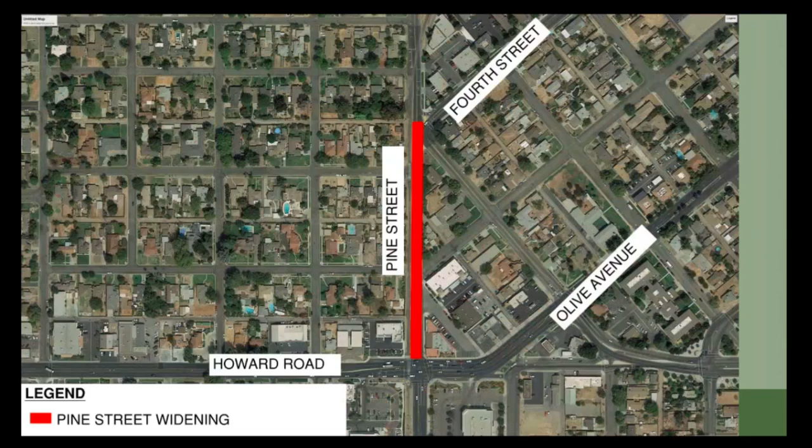So in the future, if someone bought property and they wanted to develop north of Almond, then they would be responsible for that portion. Or if somebody else built it, they would just pay us back if we were to put in that street, correct?

It depends upon how we fund it. We can go ahead and make a request for reimbursement of those improvements. That hasn't traditionally been done when we build roads, but then neither do we typically build roads where development's going to occur on it. One prime example is the roadway infrastructure out by the airport.

There's grant funding used to pay for that, and we have not requested reimbursements because there's grant funding. There are many models, and we can explore whatever you might want to look at. We can, of course, enter into reimbursement agreements where we indicate that they need to reimburse the city for their costs.

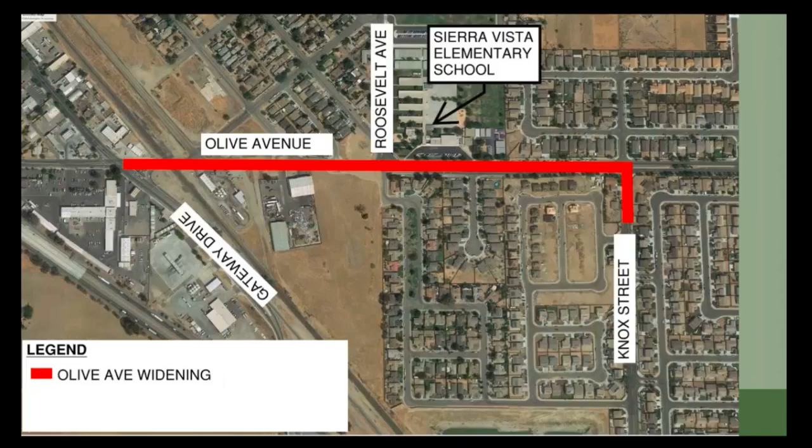Okay, so what I'm going to go back to... It's cold in here, I feel it in my fingers. You said it's cold? Let's take out my sweater. He says it's cold, turn the air conditioning down. We need to put 200 people in here. It's cold like last night, and then it'll warm up real quick. Somebody better speak, huh, you're cold. I am too, I was going to leave. It's too cold up in here. I got my jacket, okay. Somebody give him a shawl. You're a woman, want to borrow my jacket? Give him a sweater. I'll just turn the air conditioning down. Big boy, wrap you up. I can't think when I'm cold.

Going back to this list of projects, right now the CIP generally assumes Olive Avenue, Lake, Pine, and Almond. If I were to make a recommendation to council, I would suggest that the intersection of Pine and Howard move forward of Lake Street, and then we study Almond Avenue to understand further. I would agree. Good.

Councilman: Garcia, could you go back to the graph of Almond? Sure, so do they have any plans of where the access point to the subdivision would be? Let's see, right about that point they have an access, if you can see my cursor, and then there's one right about there. If that becomes a problem, I foresee the potential for medians going in on Stadium at some point in time, and possibly part of the study.

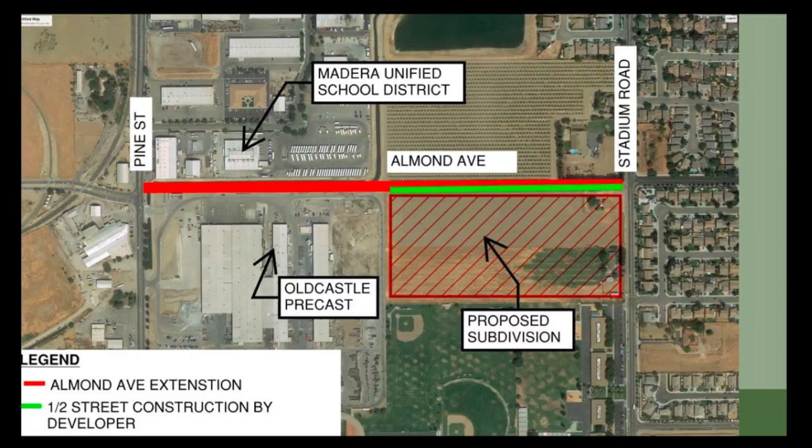To do anything else, you run out of room. To get two lanes in each direction, you run out of room for bikes. To get a left turn lane in there, you start to run out of room for two lanes each direction without starting to squeeze lanes. Squeezing lanes sometimes has a benefit, but squeezing lanes is more about reducing speed, which I'm not necessarily aware of speeding issues out there. So that would basically be where it would go, to put the road on a diet. That's, believe it or not, a technical term for traffic engineers.

You thought I was making that up? I was not. I agree with Cece. We used to take our kids to Alpha, and we also used to take them down to South Campus, and I remember it's crazy.

I'm just trying to figure out in my mind what the possibilities are to limit on Stadium Road, because as soon as you start getting the traffic and then try to have somebody cross over to the other side, to the west side, one of the ways to do that is to take away flexibility. Flexibility tends to lead to congestion and slowdowns.

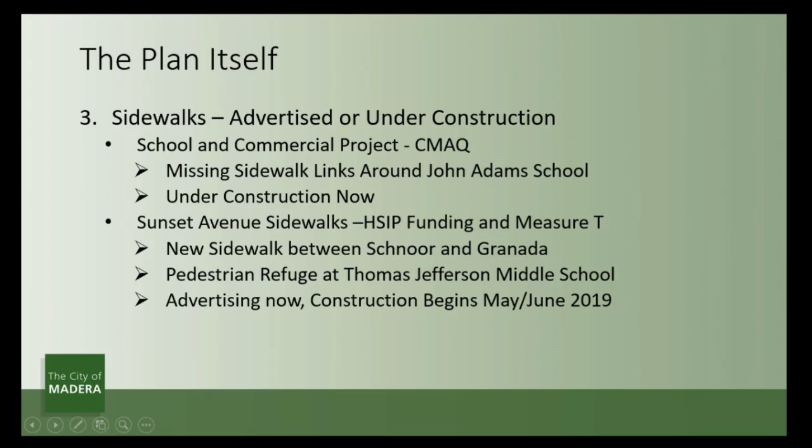This area here, under construction, or will be soon. This is the area where I indicated that there was missing pieces, and that missing piece was a problem for us a few years back when CVS was under construction. We actually had one person in a wheelchair that had to shift from one side of the street to the other, and they didn't have a place to go. We remembered that, and we're fixing that.

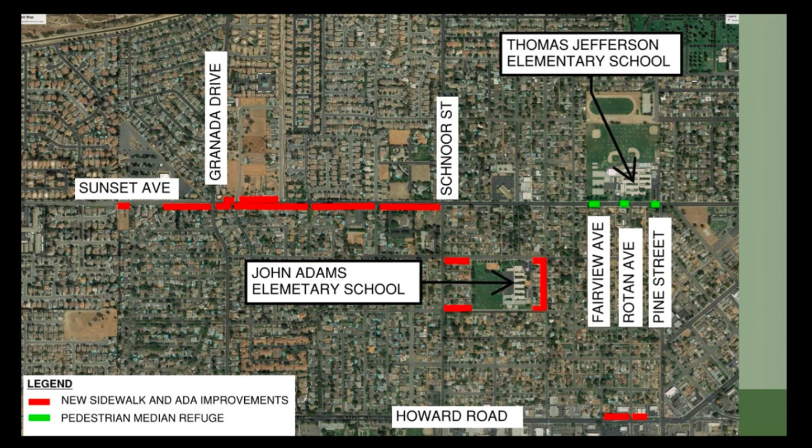Upcoming, Washington School sidewalks, we see that coming summer 2019. I mentioned that the last thing on that was right of way. If the AHSC grant is successful, additional improvements will be dropping in around that school, including pedestrian flashers, enhanced crosswalks, and a couple other things.

Fresno River Trail, the UPR undercrossing, this has been in the works for 10 years plus. We think we are finally there. It's been a long haul trying to get on the same page with the Union Pacific Railroad, but we think we're there, and you see that in the CIP going to advertising spring.

Gateway Central 3rd, additional sidewalks using CMAQ and LTF. We look to advertise that summer of 2019. That's subject to release of CMAQ funds, and there's not a guarantee that we'll have that released this year with regard to funding. Now, those projects dropping down on the street are shown here. The green is the undercrossing, and the red are sidewalks dropping in place.

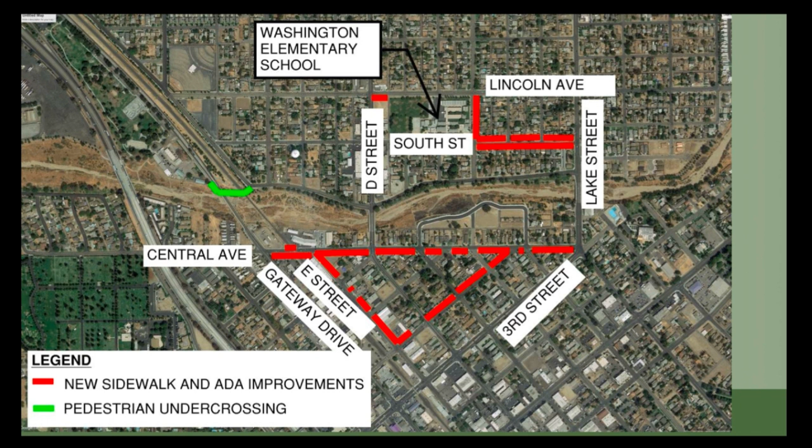They'd be coming in at least a year later, but there are time restrictions on the AHSC funds. So those will be, given there's 5 miles of sidewalks, those may very well be going out to consultants. Now, one of the things you'll see about sidewalks is we do a lot of those in-house because it's quite frankly more cost effective than hiring a consultant. When you get into more complex projects, consultants make sense.

Mayor Pro Tem Montes: I just have a question. On 145, do we stay away from that as far as maintaining the roads, doing anything, and the sidewalks as well? On 145, so it would be Madera Avenue? At the moment, yes. There's been on and off debates about who's responsible for some of those. So everybody's saying, no, you're responsible? I think we got them to believe that they're responsible. Okay.

Preliminary award, CDBG. We have 2 on CDBG right now, the missing links around James Madison and MLK. That would be coming in summer 2020 if awarded, and set as a priority over other projects. So I just want to be clear about that because we can move anything forward, we can make anything a priority, but something usually moves into the background as a result.

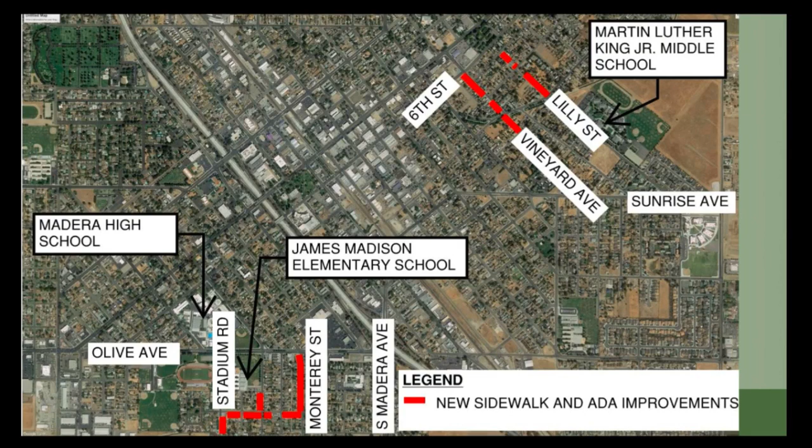There were sidewalks on the last list for the CDBG coming forward, potentially.

AHSC, the Affordable Housing and Sustainable Communities grant, that's for the low-income housing and veterans housing at 5th and C. If successful, that will not only provide the city with those structures and an improvement to downtown, but it will also result in as much as 5 miles of sidewalks and 3 miles of bike lanes. If awarded, which I believe we'll know in June, they have very specific delivery dates, and it's a fast pace. I believe it's summer 2020 for delivery, but we have to go through environmental review, and I think we avoided any right-of-way issues with regard to it. That is the AHSC grant sidewalks.

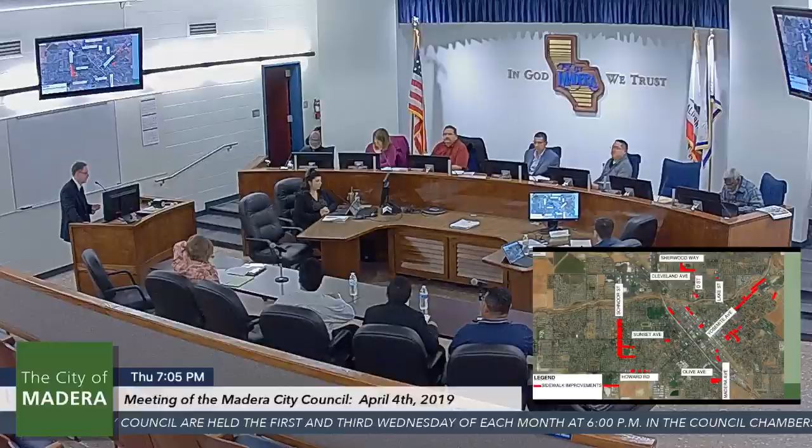Sidewalk repairs. I thought I'd throw this in because we're talking about this a little bit more these days. We don't have any projects proposed, and that's per past practice. Our current policy is that repair responsibility rests with the property owners. We do provide some assistance through the 50/50 program, which, when a property owner considers it, doesn't necessarily work out to being much assistance, because as soon as the city puts money in the game, prevailing wage requirements also come into play, as well as insurance requirements and everything else. We're kind of stuck on many of those things.

Now, can the city do more? It's kind of a cost versus liability situation. Can we get past it? What we know is if we start throwing money at repairs, we may create an expectation on the part of the community that the city takes care of the repairs. I suspect, I'd more than suspect, I know there's more repairs out there than the city can afford in a reasonable time frame. So if we start there, we'll find ourselves picking and choosing where we repair and why this person doesn't get it now or in the near future. And if they don't get it now or in the near future, what becomes of that spot? The city's now on notice, and the liability starts to hang in the air.

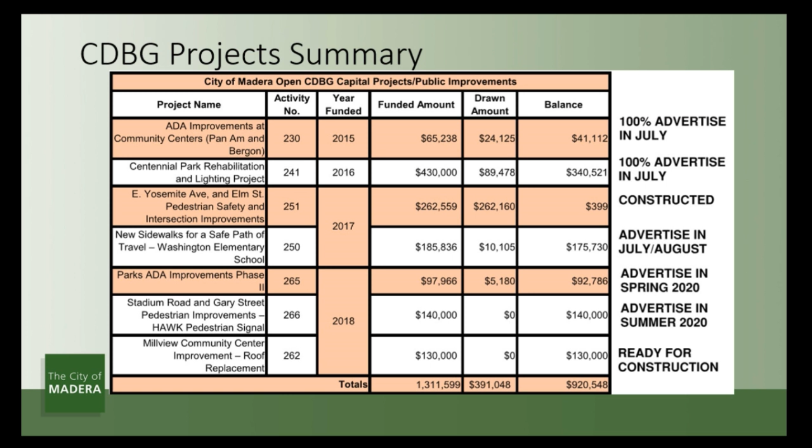That can be a selection process—council can tell us how you'd like to go ahead and do that. We generally foresee that going back to the committee, right? That's one potential way.

So that's the first two projects. Yosemite and Elm is constructed and functional. New sidewalks for safe path of travel at Washington—you saw that's for July, August. I'm not sure if there are typos here, but it's supposed to go this summer.

Parks and ADA improvements, including City Hall and a number of other things—that would be advertising in spring 2020.

Stadium Road and Gary Street pedestrian crossing—the HAWK. Have I shown you the picture of the HAWK yet? I don't think I have. I know you're all excited about it. It overhangs the street like that. I'm just going to move ahead—there's a hawk.

What it does is when you push a button, it goes from yellow to all red, functioning generally like a traffic signal. You get better compliance with this than pretty much anything else. Arizona seems to be installing these everywhere—my first encounter was in Sacramento. I thought it was a good device, researched it, and this will be our first opportunity to see how it works. Ultimately, the best way to protect pedestrians is to stop the cars in their tracks.

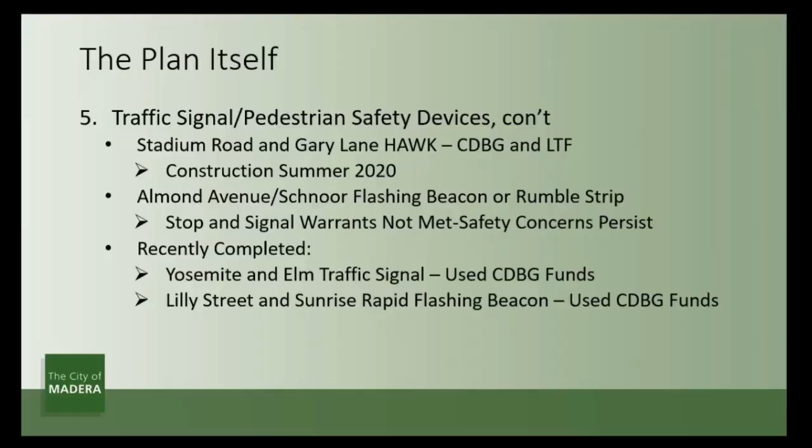Millview Community Center roof—that's okay.

I apologize, this is coming straight from other sources. You just wanted to let me know my graphic was too small. This is going out ready for construction.

Do we still use that center? Yes, absolutely. Isn't that in cooperation with CAPMC as well? I think this is the one where CAPMC threw some additional dollars in—they paid $40,000, if I'm not mistaken, toward completing the whole roof project, so this will be $130,000 going fairly quickly, and we'd have to do it in pieces.

Streetlights—that was discussed last night. We don't have any capital projects planned for that; it's outside the CIP, but ENGIE Services has identified multiple projects as part of the Integrated Energy Assessment Identification of Energy Conservation Measures project. This slide came straight from them, so I wasn't able to improve it much, but those red lines represent proposed streetlights throughout town.

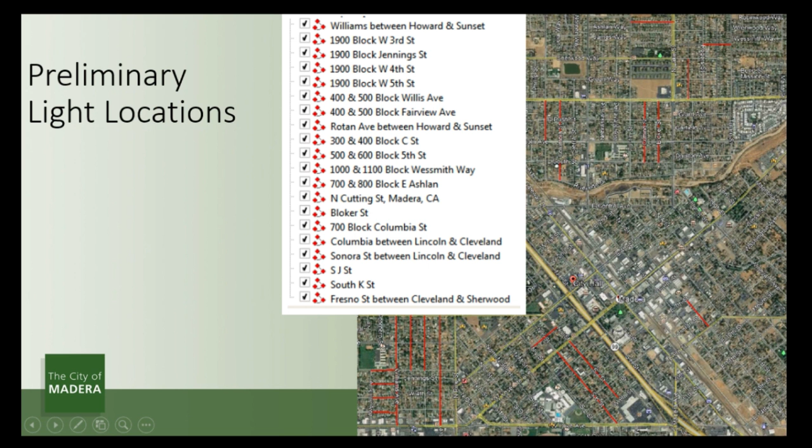I know on Railway Avenue, my street, they have a street light that's out. John's got that. Keith, what if there are some other areas that, as council members, we feel are in need of streetlights because it's really pitch black, dark?

That just becomes a choice of priorities and projects. Solar streetlights, well, they get the job done. They're not perfect, but they do get the job done. They come with additional maintenance over time, and they're a little more expensive to install, as I understand it. Plus you have the maintenance of the batteries, and the solar panel itself. They eventually wear out.

So how did we come up with this list for streetlights? Let's see, I think I'll go ahead and ask John. I had a general idea, I was working on it in my mind, but when ENGIE made their proposal, they actually came through Madera and worked with John and a few others, and just kind of recognized some areas of need.

But actually, this would be dictated by council. So if there are areas that we feel need some attention, that would certainly come from our direction. This is just what they had noticed with the energy savings, that the city council would be able to light pretty much all these areas in these particular neighborhoods. It's part of the package, to come up with a package that pays for itself over a defined time period.

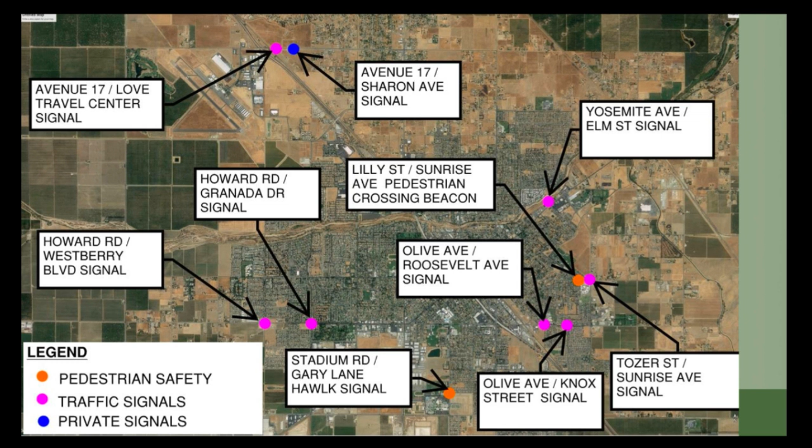Moving on. Okay, this is intermission or questions. I was thinking about putting something funny on here, but I even asked staff. We had one, but we talked about copyright. We're not sure whether we're on YouTube or not.

That was 2 of 10, Tim. You want to? Yeah, why don't we. We're just gonna take maybe 2 or 3 minutes to stretch our legs.

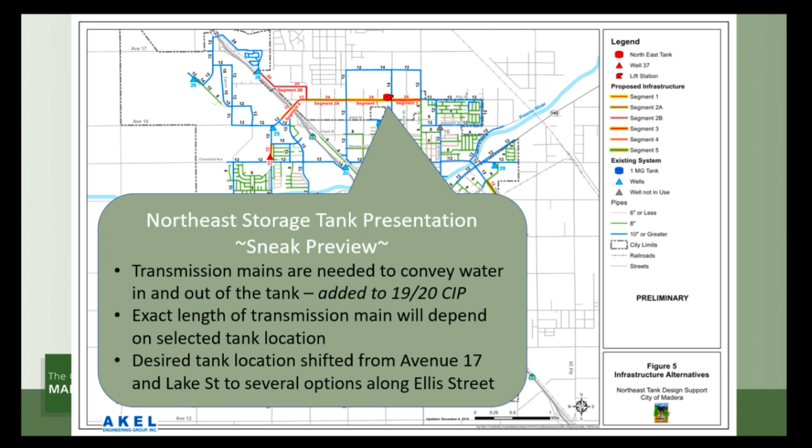This slide shows the blue line as the recommended transmission main that would be installed, tying in with the new well at Well 38 that's going in for Love's. This transmission main is 24-inch. It's going to provide benefit to the system as soon as it's in place, assuming the Love's well is online, so that will be of great benefit to the northeast side of town.

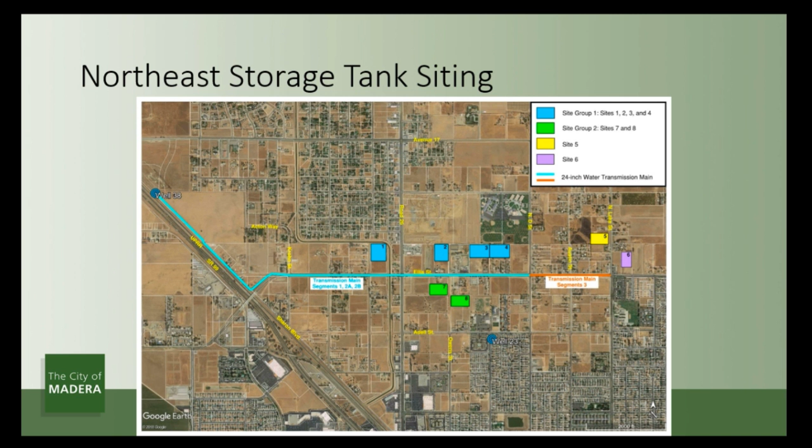The other colored squares or rectangles are preliminary sites that we're looking at. The good news is we're not finding any constraints to these sites per se, so there's still a lot of them on the table. It's making the narrowing down of choices a little difficult, but we will be coming to you in May with a suggested location to start looking at sites. And it's flexible. If it's not that one blue square, it could be the parcel right next to it, but it gives us a place to get budget figures from.

Alan, how many acres are you looking for a storage tank? We're looking somewhere between 2.5 acres. Some of the sites are already maybe 4 or 5 acres, so that's what is highlighted, but generally around 2.5 to 3 acres.

When we presented to the council in December on the tank, we had a lengthy discussion about a lot of the demand projections that have changed since the original master plan. Water usage is down, growth patterns have changed, and what that has resulted in is a projected future needed tank of about 5 million gallons at growth build out. So we're down from 6.75 to 5 at a build out size tank.

Our current needs don't require a 5 million gallon tank. They have proposed a 2.5 million gallon tank would be very sufficient to meet our needs in the next 10 years. We have also evaluated a slightly larger 3.25 million gallon tank, factoring in some drought conditions perhaps, and we'll provide the details of those analyses. And then we also looked at what happens if we just put the 5 million gallon tank in now, get it constructed and financed all at once. So all of those options will be presented to you at that meeting, and we'll have costs for those as well.

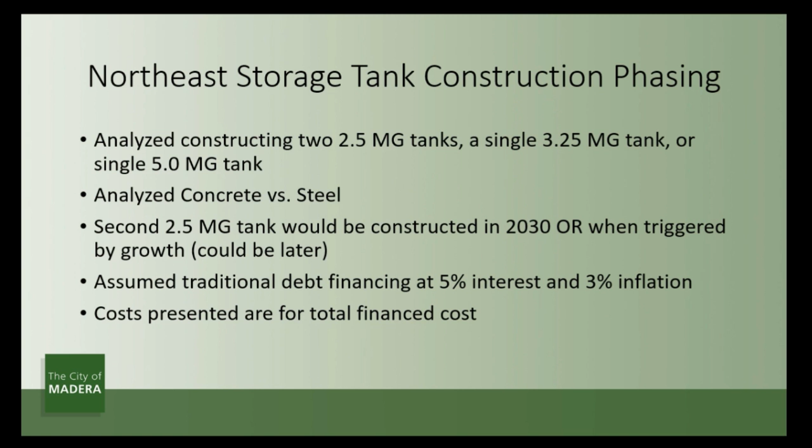The budget figures they will present haven't gone into great detail on funding options. At this point they're looking at straight traditional debt financing at 5% interest and 3% inflation, that's when they're looking at projected future costs. The costs presented are for a total financed project, which relates to the next slide.

I wanted to highlight here that the smaller of the tanks, the 2.5 million gallon with the additional transmission main, is still coming in within our original budgets established early on for the project. So that's good. The second column shows a future tank, say at 2030, of another 2.5 million. That would cost approximately, at costs 10-15 years from now, $12 million to build that second tank at that time.

The third column is what it would cost financed today to put in a 3.25 million gallon tank, probably stretching a longer time frame before another tank would be needed, if it's needed. The fourth column is if the city constructed the ultimate 5 million gallon tank today and what that cost would be. Those will be presented to you in May, and the consultant will be here to answer your questions.

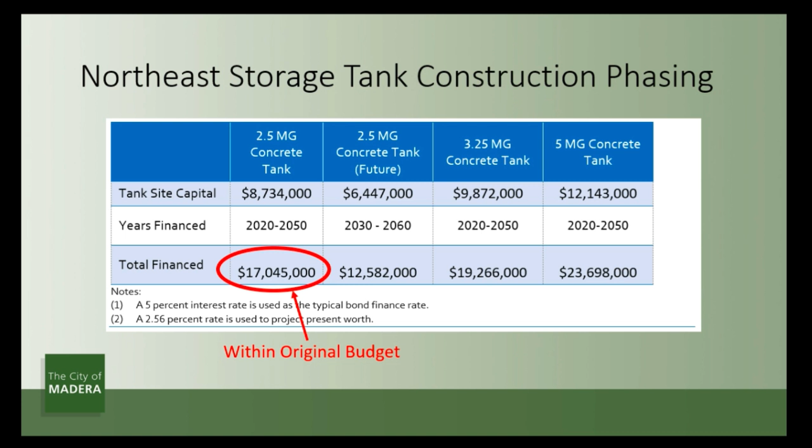Before I move on to the other projects, any questions to take back to the consultant on this that you want addressed? Or I can keep going.

So aside from tanks, in this year's water program, we have planned to replace the water main across the Fresno River where it has been exposed. With all the rain, we haven't been able to get in to survey it, so that's been on hold for a bit, but soon enough they'll get in there, and we'll have a project coming, probably under construction in '19-'20.

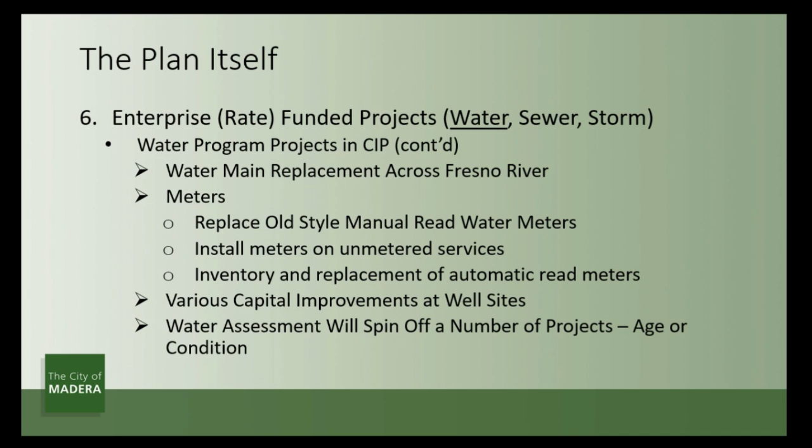We also have several projects addressing the city's water meters, getting meters on accounts that don't have meters. There aren't that many left. Unfortunately, they're the difficult ones that we've been putting off, but we're going to tackle those. A lot of the automatic read meters are now old enough that we need to start planning for their replacement, so we've got that program in place.

And then the old style manual read meters, they're not efficient. They're not capturing water usage very well. That's another large project that we have planned for this year too.

When you say that, does it mean it's charging us more than we're paying? The old style manual read meters aren't reading the consumption well, and if anything, it's shorting the city on potential revenues because they're not over-reading, they're under-reading or not reading at all. So it's a benefit for us to capture those, and it also helps the consumer know if they've got leaks or other problems on site.

Do we contact the consumers when we see that there's a leak? I don't know, they would see it in their bill. I don't know how our utility billing looks at the individual bills.

Well, let me tell you, they do let you know. I had a leak, and they showed me all the months mine was leaking. They do give you a printout of what the leaks are and how long it's been leaking, because I still have that. But they don't tell you where, you have to have somebody come out and find it. So they do update you on your leaks if you see that your bill is too high.